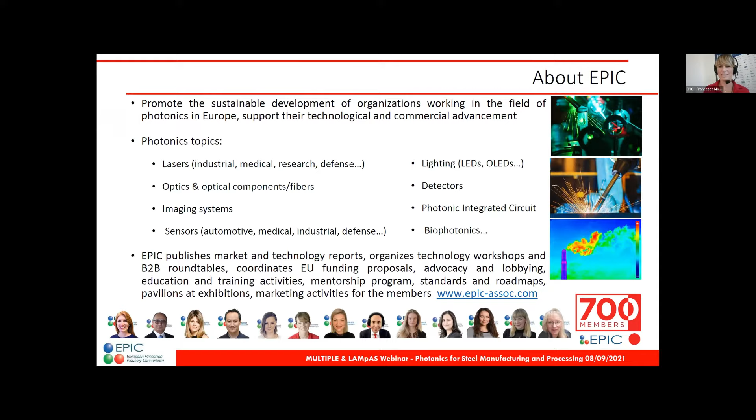Then we have a lot of initiatives. We also coordinate EU funding proposals. We are lobbying for more financing from the European Commission towards photonics, and all these activities are present on our website. So you are very free to join us and see what EPIC is doing for the photonics community. And now it's time to spend a couple of words about the two initiatives that we have here today, MULTIPLE and LAMpAS.

I start with MULTIPLE, which represents the future of photonics-based process optimization. We are halfway through our project, and the idea is to provide cost-effective multimodal monitoring solutions. We have a full solution that will be monitoring and optimizing the manufacturing chains in different industrial fields. And then we have 5 building block products that can be flexibly combined with each other and used for different applications: snapshot, visible and SWIR hyperspectral imaging cameras, laser-based IR analyzers that we will hear about from our partner today, organic electronics-based spectrometers, multimodal monitoring systems, and cloud and edge computing platform and services.

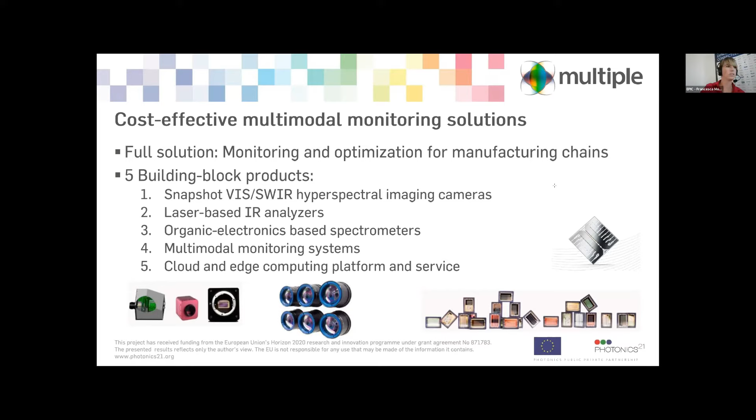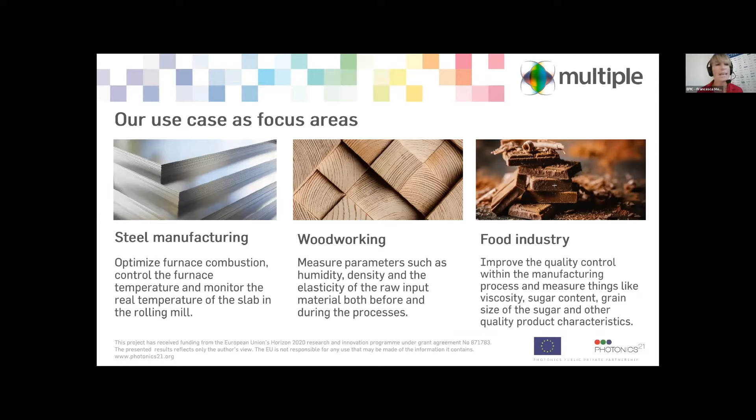First, I have to spend two other words about LAMpAS. LAMpAS is there for basically giving us the possibility of surface enhancement inspired by nature. Because basically we realize that if we are inspired by nature, we can see that if we can control topographic characteristics over surfaces, we can really give special functionalities to surfaces. And this can be antibacterial, self-cleaning properties, friction reduction, optical security function, or even decorative effects.

And this is possible usually with coatings or with extra chemical components that we can add to surfaces, but also with lasers. And this is possible only with special lasers, the ultra short pulse lasers actually, that can really generate these multi-scale topographies on the surfaces that give these characteristics to the surfaces. The problem is, this is possible, yes, in research labs, but is really not yet suitable for mass production, low cost, and especially high throughput.

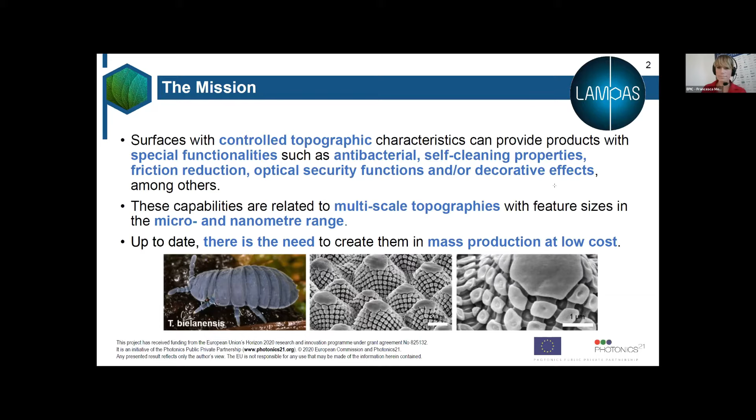Now you are starting to put the puzzle pieces together, I assume, and then we will integrate everything in a device, a big machine, a system design from our partner Lasea, and then we will be able to use it also for different applications. But maybe we will talk about it in another webinar soon. We focus today more on process control.

You are muted. That's the standard. No, you are still muted. Now? Yes, now, sorry. Very well. No problem. Good afternoon, everybody. I will introduce our company, okay? Let me see here. Sorry, I cannot find it now. With the space bar, you can change. Now, yeah. Okay. Perfect. Sorry about that.

LDL key data. We are the latest European rolling mill. It's a greenfield project in Tarnos, France. We started operations in the first quarter of 2018 with the production of heavy plates. We have a capacity of about 500,000 tons. We have 20,000 square meters on 10 hectares. We are based in Tarnos, a small town at the port of Bayonne in France, in the Bay of Biscay.

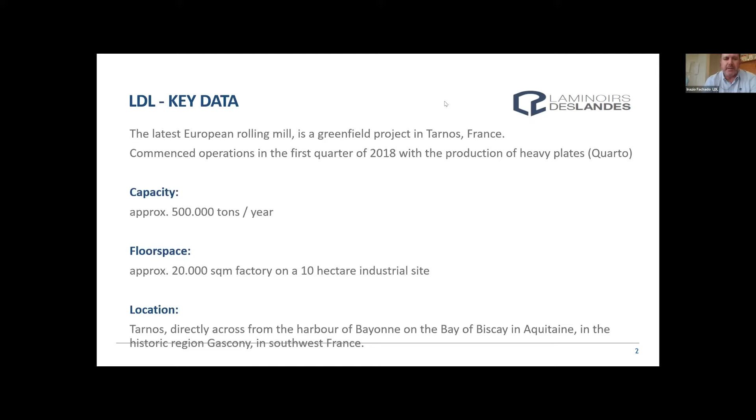What we do: we manufacture heavy plates of reliable tested quality. Our target is to offer the highest quality steel: thermomechanically controlled rolled fine grain steels, high tensile heat treated fine grain steels, and wear resistant steels. We try to make the difference by going to the highest quality. So the market is focused on normalized fine grain steels, obviously certified to the higher European standards, ASTM, ASME, etc.

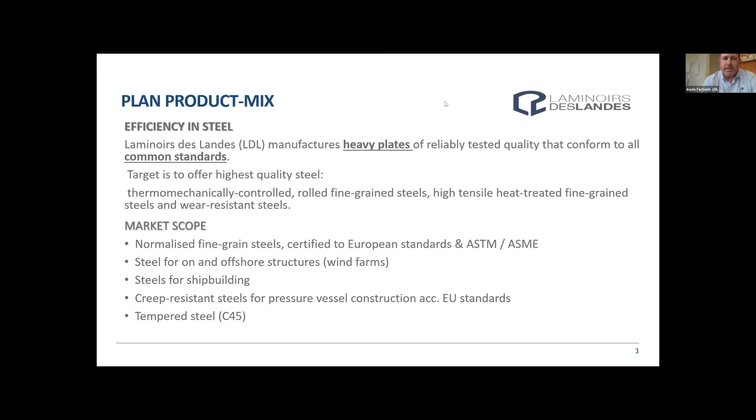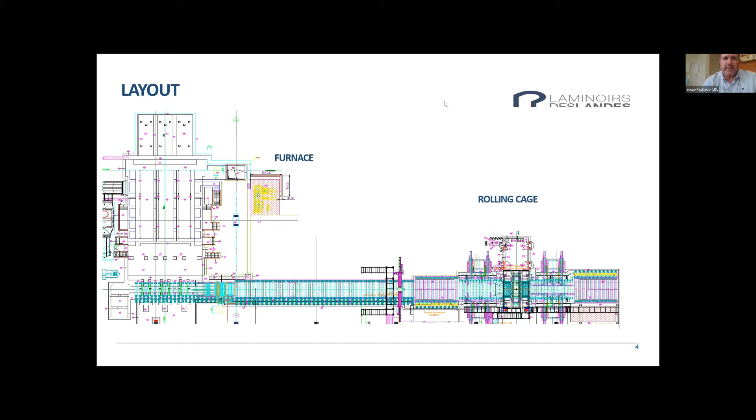Our furnace is a pusher type reheating furnace with a capacity of 80 tons per hour, working in 3 rows of slabs with a maximum length a bit more than 3 meters each. It is complete with a slab charging device, again pusher type, and the discharging system with independent trolleys. We can put slabs of a thickness between 200 and 300 millimeters, width from 1850 to 2500, and about 30 tons maximum weight. The rolling temperature this furnace has to bring the slab to is 1200 degrees.

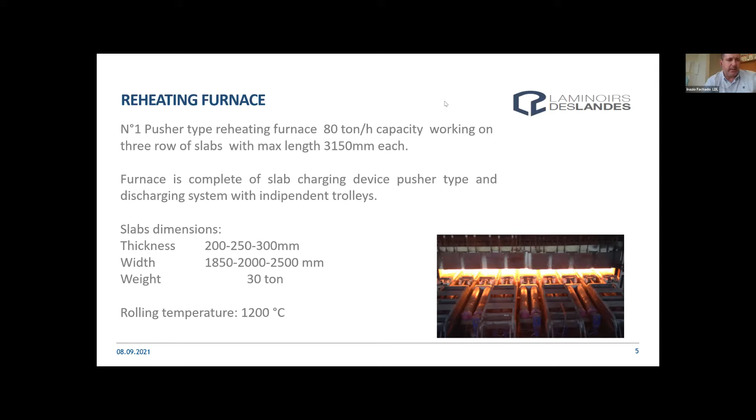We roll in a quarto type rolling mill. So we have 4 rolls, two backup rolls and 2 work rolls. The backup rolls are 1600 millimeters diameter, and the work rolls 950. The big ones weigh about 63 tons, and the work rolls 23 tons. We have 2 electric motors giving 6,000 horsepower and producing a separating force of 4,000 tons.

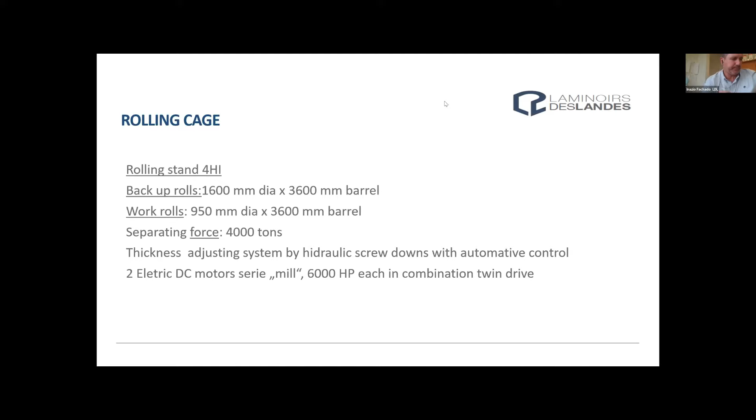We have all control and the thickness adjusting system by hydraulic screw downs with automatic control, which is AHC. So what is the steel plate secret? It is the combination of forces, temperature, and time.

Okay, the objective is to reach quality plus N and plus M. Plus N is what we call normalized rolling. It is the process in which the final deformation is carried out within a specific temperature range. The result is equivalent to normalization through heat treatment in a furnace. In this case, the rolling temperature is always above the transformation temperature.

And we also have the objective to produce plus M, called thermomechanical rolling. That means the final deformation is carried out within a special temperature range in order to achieve a steel with special characteristics that are not possible to obtain with a simple heat treatment. The result is very high quality steel, a fine grain microstructure which simultaneously offers good strength and cold forming properties. This can also be combined with a process with increased cooling speed, as the accelerated cooling process. Okay.

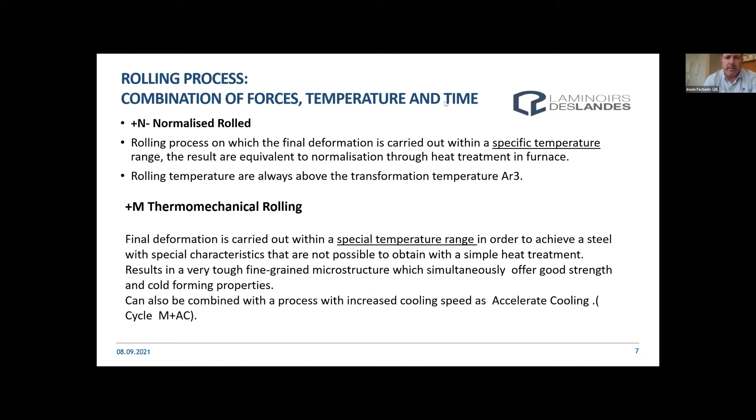So now we are entering the rolling process. What we have done in the furnace, we have implemented AirOptic gas analyzers. These gas analyzers will allow us to control the gas from areas within the oven. We have 5 areas, and we are able to much better control the working of the furnace. We will reduce the delays due to low temperature.

Sometimes when we start rolling at the beginning of the shift, despite the system telling us that we have the temperature, we start the first slab and we see when rolling starts that it didn't reach the proper temperature. So that will allow us to reduce these delays at the beginning of the shift. This gas analyzer will also allow us to secure the regulation of the furnace, secure the combustion, and reduce the CO2 and NOx.

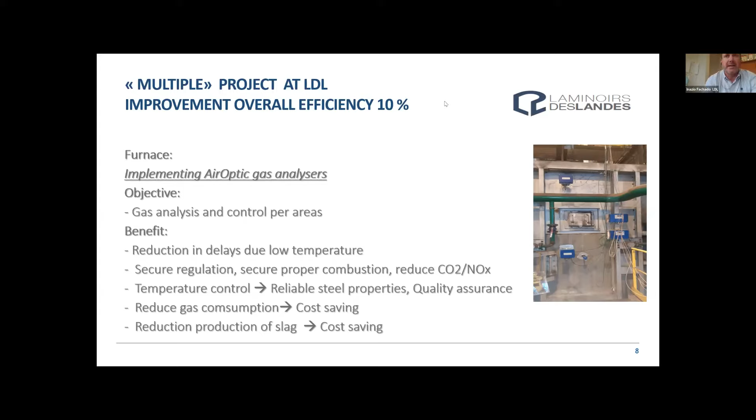And as a consequence of all the earlier inputs, we will also reduce the production of scrap. The scrap is steel that we will not be able to sell as a plate, so it's a loss. So the less scrap we make, the better. Okay.

And finally, in the rolling stand, we have installed 3D cameras at the entry and the exit of the rolling stand that will allow us to better control the thickness and also the steel grade. This way we will avoid some slabs being loaded by mistake, and it is another checking point that will help. So the benefit of these cameras will be more reliability when controlling the temperature.

Nowadays we have some Temposonics, but it's always about how to calibrate the Temposonics. We have to check very often if the Temposonics work properly or not. So with the cameras, we will be able to see if the Temposonics are right or not.

Okay. We have also installed a profilometer after the leveler. Again, it will help us to measure the thickness of the plate. Whenever we have to calculate from the slab to the plate, the programming is always focused on matching the norm tolerances, but also with the objective to use as little slab as possible. But it might happen that the calculations are wrong and we don't reach the thickness tolerance. So the more we control it, the better it will be for us.

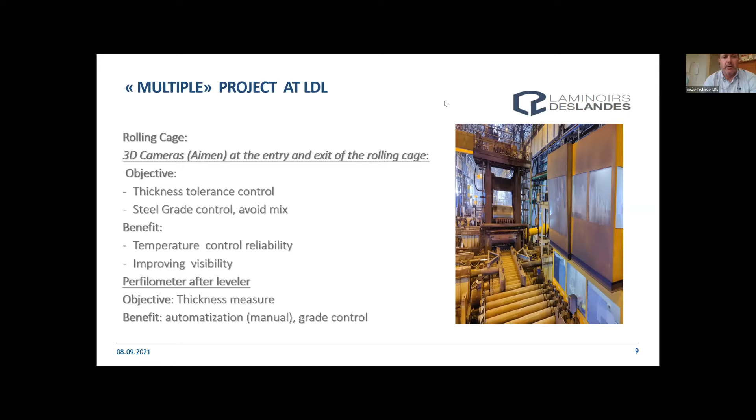And another benefit of this profilometer is that it will allow us to automate the process, because nowadays we are controlling the thickness by hand. We will avoid this hand control, and it also allows us to better control the grade of the plates. So basically it's all about the process, and we are very confident that now we are in the process to activate all the data collecting, and we expect to reach the target. Okay.

So my name is Pawel Kluczynski. I'm the CEO of Airoptic, and today I will talk about application of laser-based analyzers in the steel industry. I will try to present more from the analyzer side rather than application, because you already presented the goal for usage of the gas analyzers. So first of all, some brief information about our company. We are a small medium enterprise based in Poznań, in Poland, and we manufacture laser-based gas analyzers for various industrial applications. The steel industry is something which we started very recently.

But we mainly focus on applications in industries where traditional gas measurement is difficult because of high temperature or difficult conditions, or where fast response time is very necessary, as well as low maintenance. We mainly work with the power industry, petrochemical industry, chemical industry, wood industry, and, as I mentioned, also steel. We have in-house technology and an R&D department on site, so we can also make customized solutions for customers if there is a special request. We mainly work on export: 90% of total revenues accounts for export and 10% for the internal market.

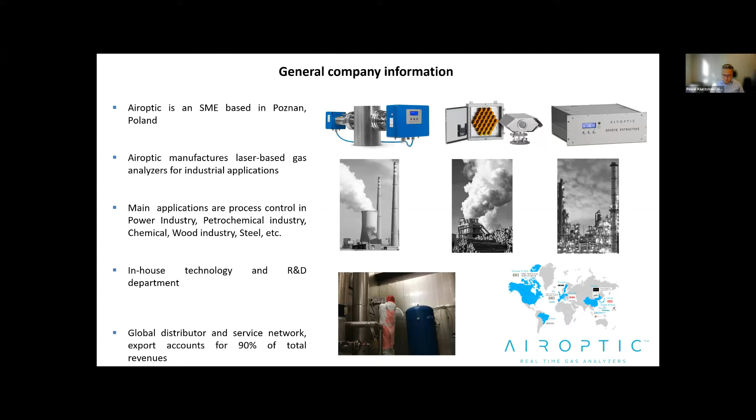We have different kinds of gas analyzers, all based on laser technology. Today I will only talk about so-called in situ analyzers, the ones which are used directly on the process, without any sample conditioning. But just to mention, we also have open path analyzers, so we use laser technology to measure around the fence, so we can measure leakages from different industries at up to 1 kilometer distance.

And finally, the extractive analyzers, more the traditional type, where the sample is extracted from the pipeline with some sample conditioning system, and then the analysis is done internally in the analyzer. It's more like a gas chromatograph, but it's based on laser technology. But it's a bit outside of the scope, so let me continue.

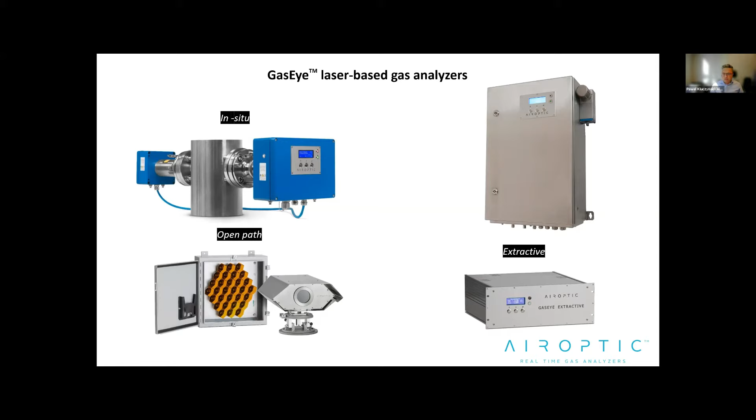So when it comes to the in situ analyzers, as I mentioned, the systems are relatively easily mounted on the process. It can be a chimney, it can be a furnace, it can be any pipeline. And you do it with different kinds of flanges. In Europe, we have DN50 flanges, but we also have ANSI standards for the American market, and also JIS for Asian markets, and that's basically just a matter of configuration.

But the idea is that you measure directly in the process, so you have a very fast response time to whatever happens to the flue gas or the gas you measure, and that's why we can have different applications for control. So basically, process control of different industrial processes. Typically, combustion control. It can be also safety application, like you basically monitor some process and monitor some gas which is critical to the process, like carbon monoxide and oxygen.

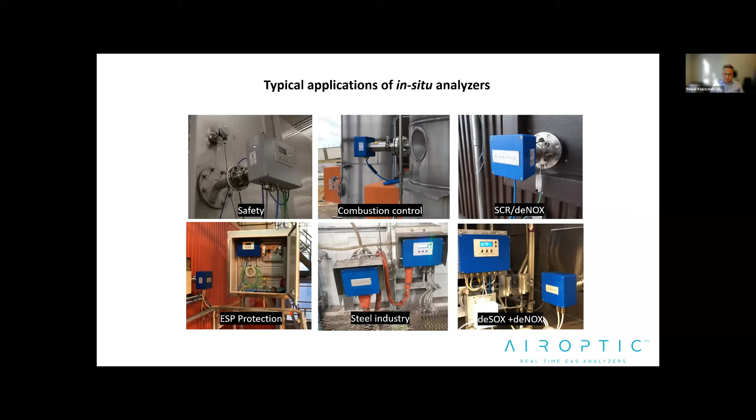So the principle of operation, the physics is very simple. This is based on the absorption technology. The system consists of two units. It's a transmitter unit which sends the light from one side of the process to the other, so shining the light exactly through the process. And then what we do is we measure the absorption of the gas. So the gas acts like a filter, basically, which selectively reduces the light intensity after passing through the process.

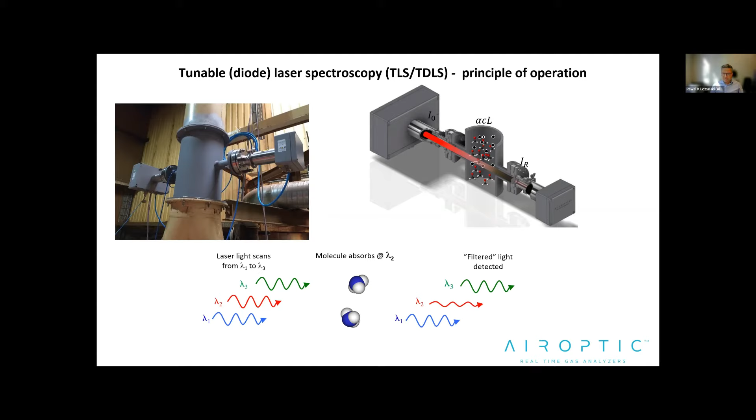So that's in principle very simple physics, but the difficulty in practical conditions is that normally you don't only have the gas of interest, you have also a lot of dust. For example, if you burn coal in the coal-fired power plant, there's a lot of dust which scatters light more than the molecules actually absorb. But the analyzer is capable of distinguishing between one and the other. So it's very selective and very sensitive. So absorbances down to 10 to -7 in relative units. So compared to FTIR, this is already three orders of magnitude.

So one of the typical examples of the application is combustion control. In the beginning, we only used the oxygen system. So we are measuring oxygen basically directly in the boiler above the fireplace to try to optimize the combustion process in real time by using our signal. Then we also added carbon monoxide analyzers, so you can actually try to optimize combustion a little bit closer.

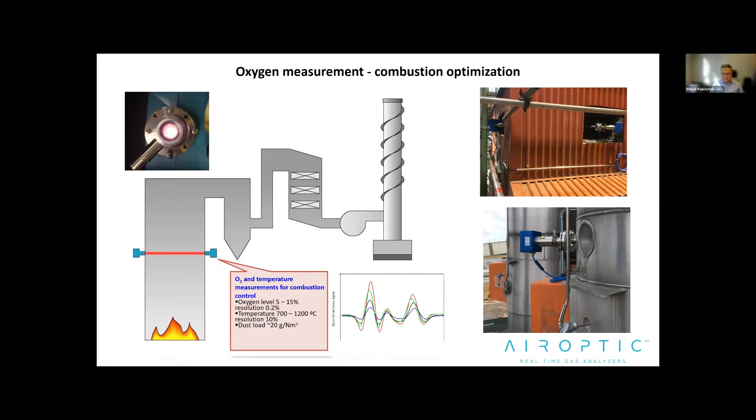And that's what's typically used in the boilers, so not in the steel plants, but at a bit lower temperatures, say in the power plants or in some chemical processes, and anywhere you have a combustion. And it seems to be already well-proven technology and accepted.

So the drawback of the in-situ lasers is that they are very selective, but you need basically one analyzer for one gas. So what we did in 2018, we released a model which combines two lasers into one analyzer. So the form factor is basically the same, but you are measuring carbon monoxide and oxygen and water in one analyzer. And this has already been proven in smaller stacks and for combustion optimization in smaller boilers, and also in some power plants.

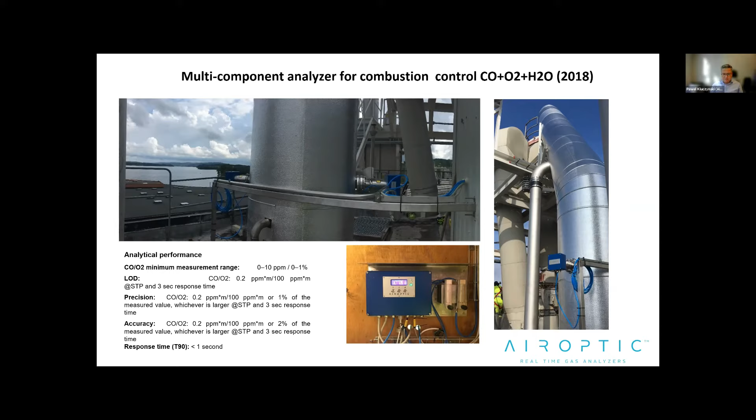And then we asked ourselves the question, can we use it also for different processes like the steel industry? And that's what we did a couple of years back, but for a little bit simpler case, when we had a hot rolling mill and optimized the furnace conditions by measuring either the oxygen or carbon monoxide or both. And the only difference with the boiler was that here the temperatures were up to 1350 degrees, so the conditions were slightly more difficult, but it also proved that this technology can be applied to the steel industry.

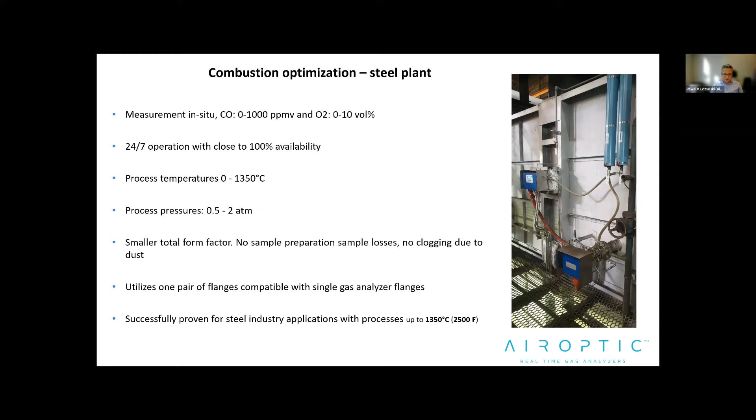There are some technical issues here, that we have to add some additional cooling devices if the ambient temperature is above plus 55 degrees, but nevertheless, it proved to be working fine. So the next step was, except for combustion control, can we use something else? Can we use some other type of optimization?

So we also had the installation for optimizing the fuel, the measurement of the fuel composition of the gas which feeds the furnaces. And that was done, for example, in the case when the gas used for the reheating furnace is mixing different types of gases available in the plant. And these components can be changing in time. So the customer wanted to have the knowledge of the real-time composition of the gases.

And we deployed two analyzers, one measuring methane, ethylene, and water vapor, and the other carbon monoxide, CO2, and H2S. So basically, this was enough for the customer to get some additional knowledge in real time about the gas feeding the furnace.

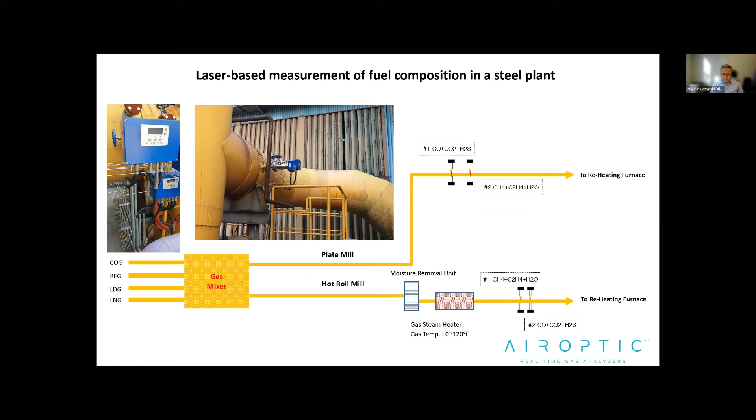And now, finally, what we try to do in multiple projects, together with LDL and Russula and Aimen, is to have a very advanced analysis of what's going on in the reheating furnace. As Ignacio already showed, there is a plan to deploy analyzers in 3 different points, and not only measure the carbon monoxide and oxygen, but also extend it to temperature, water vapor, CO2, and also NOx. It's not shown on the graph, but basically to have a very complex analysis in real time of the

gas composition. By means of this, we hope to save energy, basically by optimizing the combustion process more closely and precisely, but also to reduce waste in the form of waste material. That's what Ignacio also mentioned in his presentation, that if the combustion is not sufficient or the conditions in the furnace are not optimal, then it produces waste.

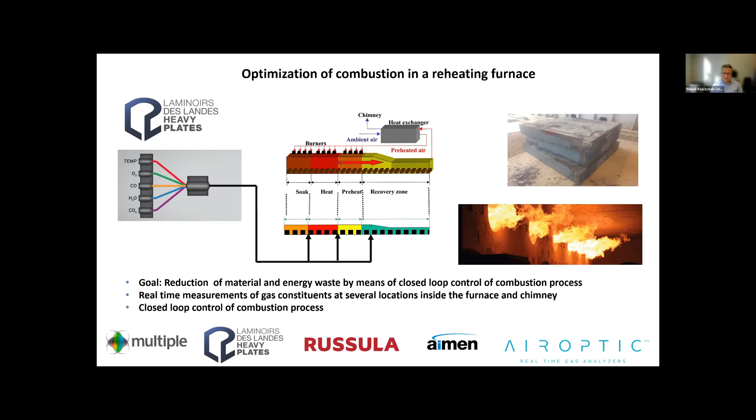The project has basically started recently. Now our systems are installed at the LDL, and I hope the first results can be expected in September already. We are all very curious how it will all work in the closed loop system, because the idea is also to use our outputs of the gas concentration in the edge computing device. That's the whole idea about Multiple.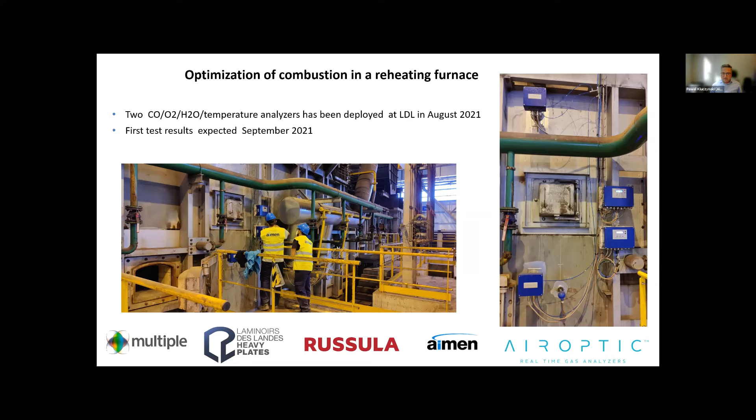And also I hope in combination with the camera information to have a more profound control of the furnace condition. This is really something new which had never been tried before, so we are all very excited. From our part, the analyzer part, just to summarize, in situ technology as such can provide really fast response times, because this was already proven, and it can in general be used in fast closed loop control, because most of our clients use our analyzer in fast loop control. This is really something standard in the power plant today.

And for the temperatures, there is basically no high temperature limit for the spectroscopy. Because we use laser, it's very selective and sensitive, so it's not like the non-dispersive techniques. Last but not least, these analyzers are made for 24/7 operation. They have a self-calibration feature, which gives you low maintenance and low cost of ownership in the end. Mechanically, they're also suitable for this type of environment, and we can deploy them in hazardous areas if necessary, for example zone 1 or even zone 0. So this concludes my talk, and I'll be happy to take any questions.

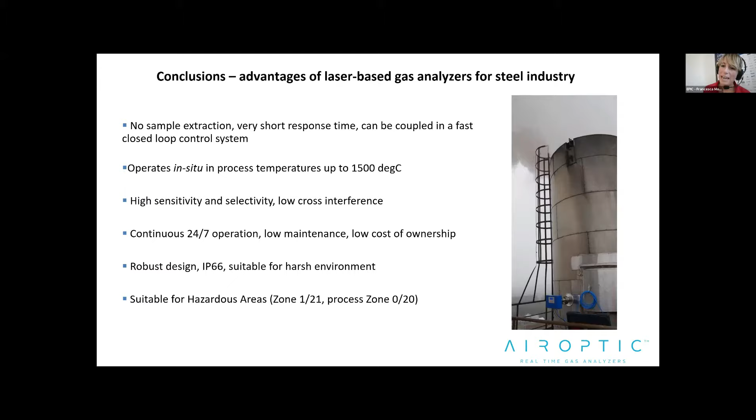Thanks a lot, Pavel, also for highlighting the specialty of Multiple, and especially your role in this. An important thing Multiple is doing, apart from this adaptability to different manufacturing conditions, is the broad spectrum we are covering. We can go from visible to mid-IR, and actually you are the mid-IR person in Multiple. For us in EPIC this is really important because we have now started an adventure with the Mid-IR Alliance, an initiative to push the mid-IR technologies a bit more. Here in the room we also have Rodrigo, who will later talk about this wavelength range. So today is also a bit the long wavelength meeting.

So maybe Pavel, you can tell us a bit about your experiences, because you have been an integrator of mid-IR technology since you started, since that's a range of high interest. Can you give us a hint on what the challenges are for you as an integrator of these technologies that could be faced to improve your technology for steel processing, but also for other applications and gas sensing?

Yes, definitely. Francesca, of course the paramount goal is to be able to combine mid-infrared technology with near-infrared technology, to create a wide broadband coverage, because broadband coverage gives you the possibility to measure several components at the same time. This is something everybody needs in any industry, because we need tighter control. The more parameters you control, the more gases you measure in our case, the more added value. So of course the challenge is being able to combine the wide wavelength ranges with the available photonics devices today.

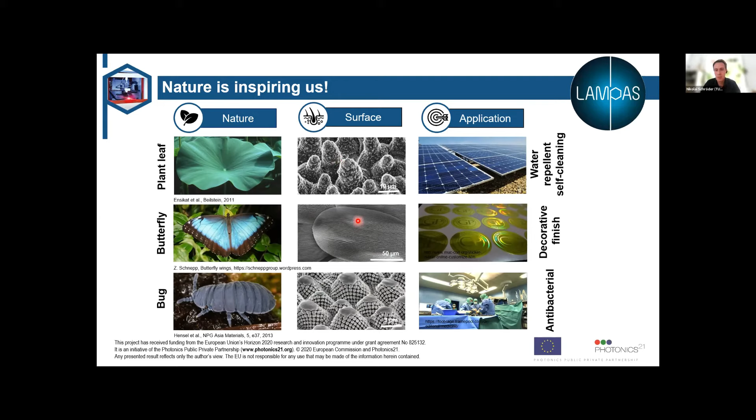And now we can create these surfaces directly with lasers on a lot of different materials. And we are doing this with some technologies. Here I'm going to present two of them. First of all, direct laser writing.

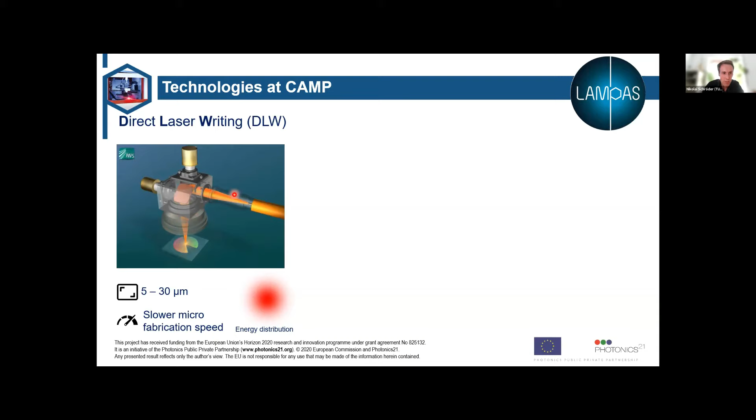Here we have a laser beam which is deflected by a galvanometer scanner and is brought to the surface of the sample. Here we achieve a resolution from 5 up to 30 microns. And let me say it's a slower microfabrication speed compared to the next technology I'm going to present. And the energy distribution of the laser beam is here dot-like.

Our main research area is direct laser interference patterning. In this case, we have one laser beam coming into this DLIP optic. And in this optic, it is split into two sub-beams. And in this case, with a galvano scanner, it is deflected directly onto the surface of the sample, so that we can achieve a so-called interference pattern on the surface.

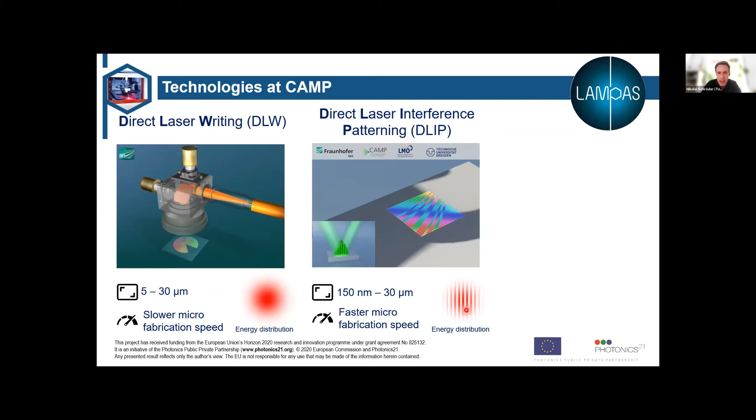Here we receive feature sizes from 150 nanometers up to 30 microns, and it is a much faster fabrication speed compared to direct laser writing. So how many patterns can we generate with these DLIP experiments? In this case, we have a line-like pattern on the surface, but there are thousands of possible patterns.

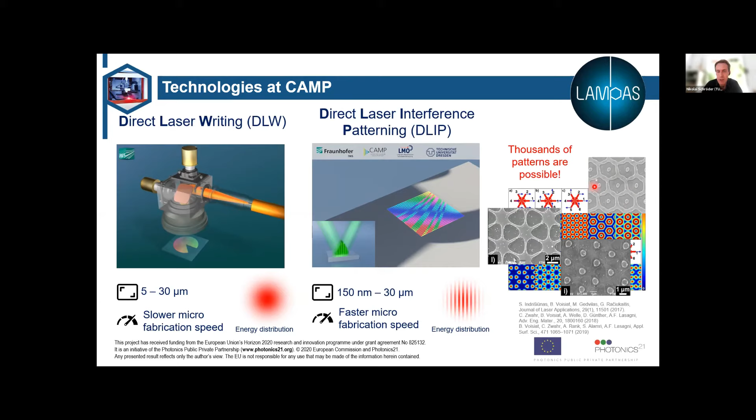It depends on the number of sub-beams and on the type of polarization of these sub-beams. And here are some examples of surface structures, like flower-like or like a honeycomb. It depends on the application you would like to achieve. And how can we produce it? Here we have two scenarios.

Scenario one means we have low pulse energy and a high repetition rate from the laser. Therefore, we need a several kilometers per second, and we receive significant heat accumulation, which is not good for our material because it will be destroyed. Scenario two means the laser has a high pulse energy and a moderate rep rate. Here we can achieve high throughput with large spot sizes, but unfortunately, the feature size resolution is pretty low.

So our solution to make it better is direct laser interference patterning. Here we have high pulse energy with moderate rep rates, and we are using so-called interference patterning. Here we reach scanning speeds of some 100 meters per second. We will do this with a polygon scanner. We receive lower heat accumulation and, of course, higher resolution due to the interference pattern.

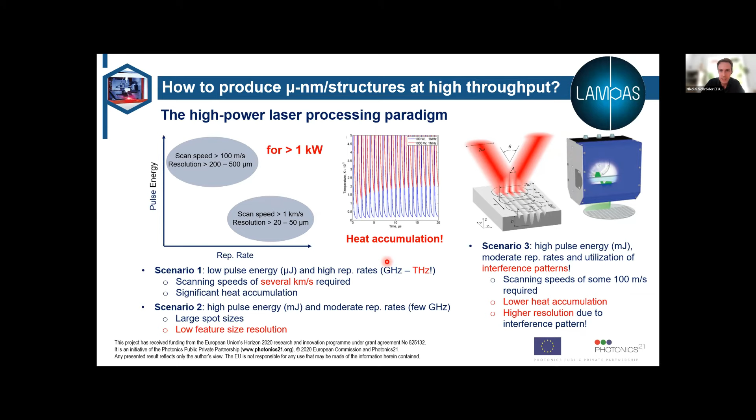And this technology we are integrating into LAMPAS. It is multi-beam high-speed processing. Here are shown the 6 sub-elements that we will develop during this project. First of all, we need interference patterning for high-resolution beam processing. The polygon scanner will bring the laser directly to the surface of the sample.

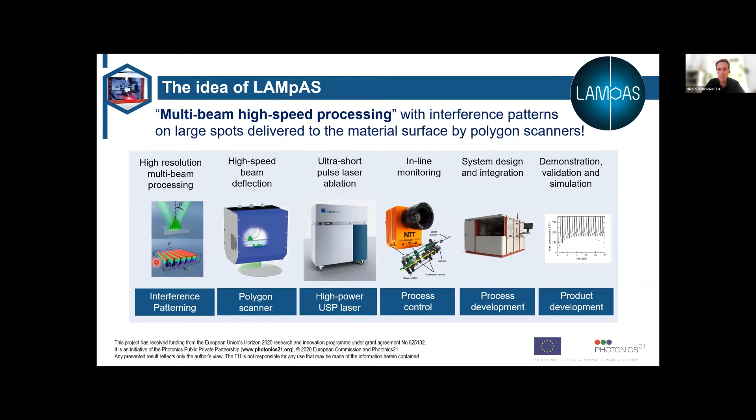And of course, we can't ablate or generate a surface structure without a laser. That's the reason why we are developing an ultra-short pulse laser system. The inline monitoring system ensures the quality during the whole laser structuring process. This I will present in the next slides. And in the end, we have to integrate these 4 submodules into a whole new machine. And of course, we have to validate this machine with some samples in the end.

In this project, we are 8 different project partners from all over Europe. Trumpf is a huge laser developer. They will do the laser development, and the beam deflection system will be done by NextScan and by the Technical University where I belong. The process monitoring system is done by NIT and also by the Technical University.

The system integration, so the combination of all these sub-modules, will be done by LASEA. And of course, the validation and demonstration is done by Bosch and BSH. And for organizing these events, EPIC is doing the dissemination of LAMPAS.

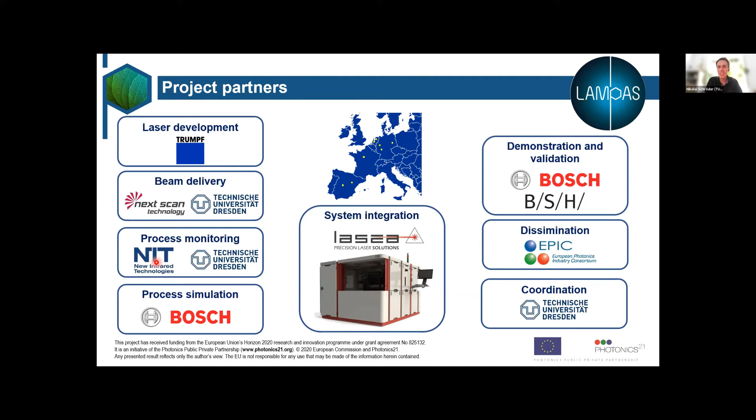Now we come to this unique inline monitoring system for LAMPAS. In this case, we will monitor two process effects. First of all, the accumulated heat that we don't want to have during the process. And of course, we would like to correlate this with the topography assessment of the patterned structure.

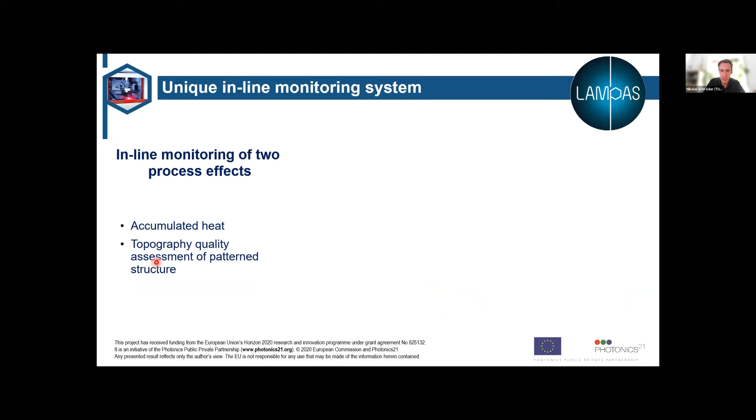And we are realizing this with a combination of a high-speed infrared camera, which is done by NIT, and what's also new is the second one that we are combining it with: the fast Fourier transform system. So that's a unique measurement system for analyzing the topography of a periodic pattern.

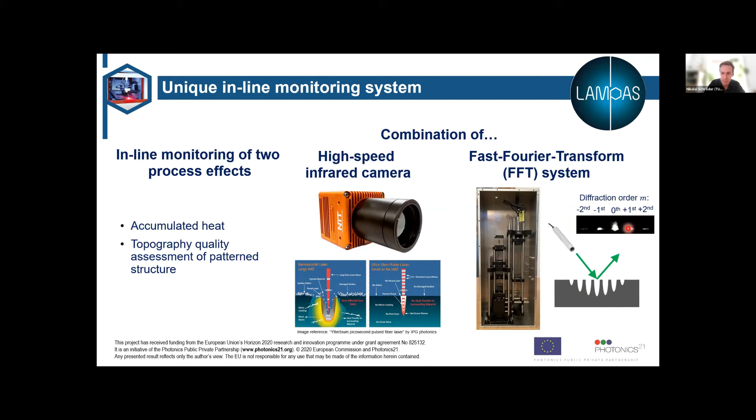So what do we need for it? First of all, we need a laser pointer, a low power laser with a low laser power, a periodic structured area, and of course a screen. We are using it here with a camera. So that means when the laser irradiation hits the area, the laser light is separated like this into some clouds. We call these diffraction orders here. And depending on the quality of these laser structured areas, the intensity or the behavior of this diffraction pattern will change. Let me show how it works in real life.

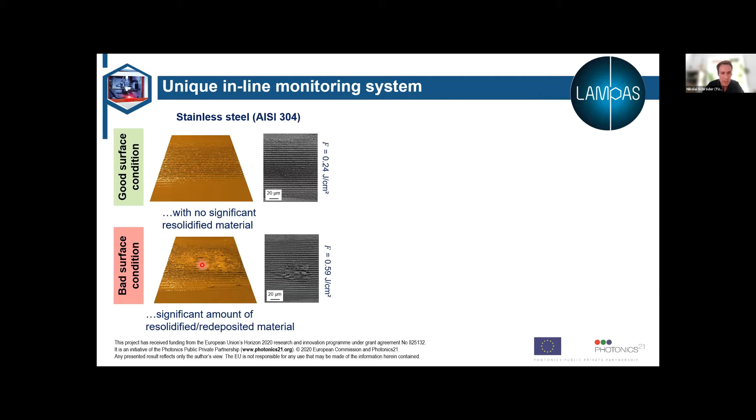Here are some examples of structured stainless steel. Here we have microscopy images of a good surface condition. Here you can clearly see the line-like pattern from the DLIP treatment, and there is no significant resolidified material on top of it. Down, there is a bad surface condition with a huge amount of resolidified material on top of the line-like structure. So in the end, the pattern is destroyed.

We monitored this process with the infrared camera, and we can clearly see that there is a change in the temperature depending on the surface quality. And of course, when we are doing this surface analysis with the FFT system, we can also see that there is a change in the behavior of the diffraction orders. Here, when we have a good quality, like here on the top left side, we can see the plus minus second cloud, and this cloud we don't have in the bad surface quality. So in the end, we have a powerful tool to differentiate good surface quality and bad surface quality.

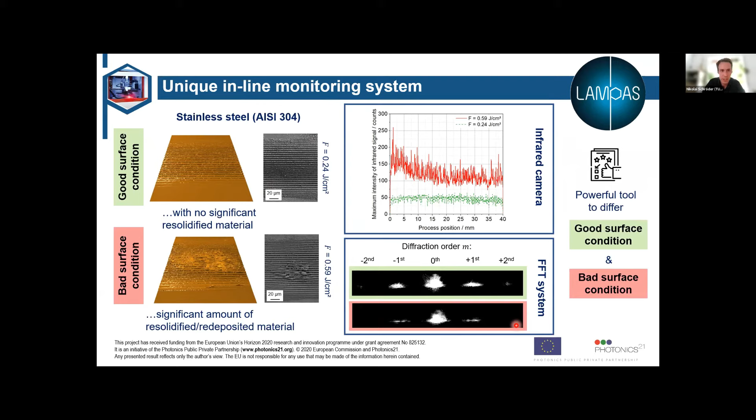What are the objectives and benefits of LAMPAS? First of all, we are going to develop a high power ultra short pulse laser system with up to 1.5 kilowatt of laser power. With this, we are achieving high throughputs up to 5 square meters per minute. The resolution depends on the unique application. With the monitoring system, we also achieve minimal workpiece heating, and of course, advanced surface functions on large areas.

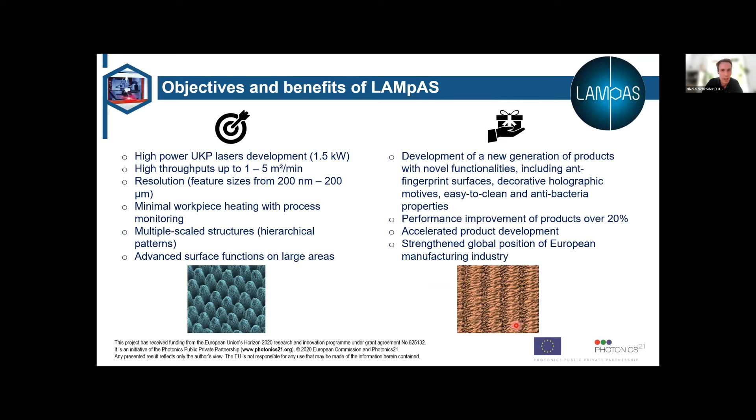So the objectives of LAMPAS are, of course, development of a new generation of products, with different special applications. The performance improvement of these products is also pretty important. And what's also quite good for the industry is that we have an accelerated product development. And what's pretty important for the European Union is that we are going to strengthen the global position of Europe in the world.

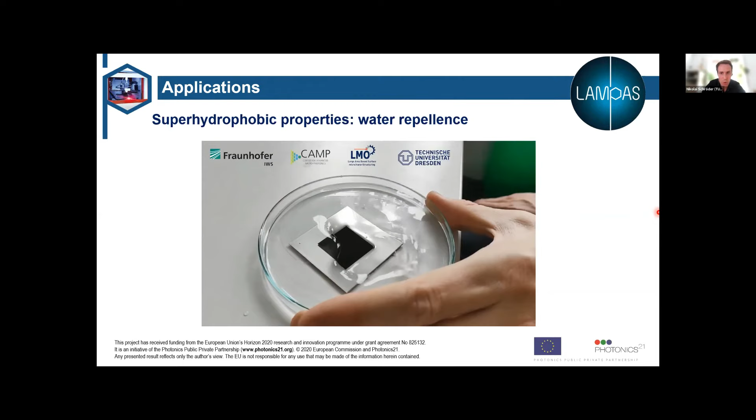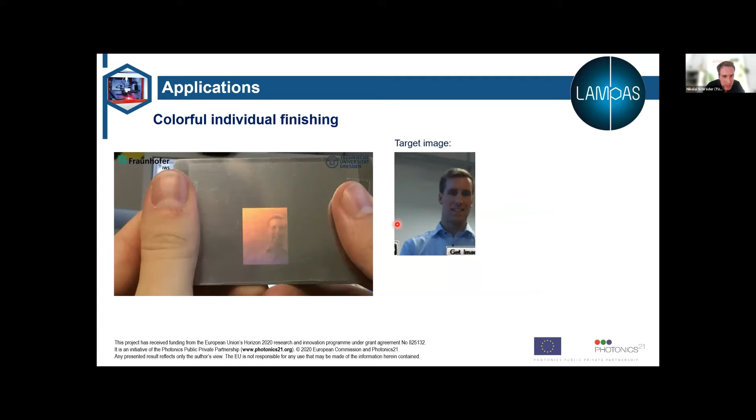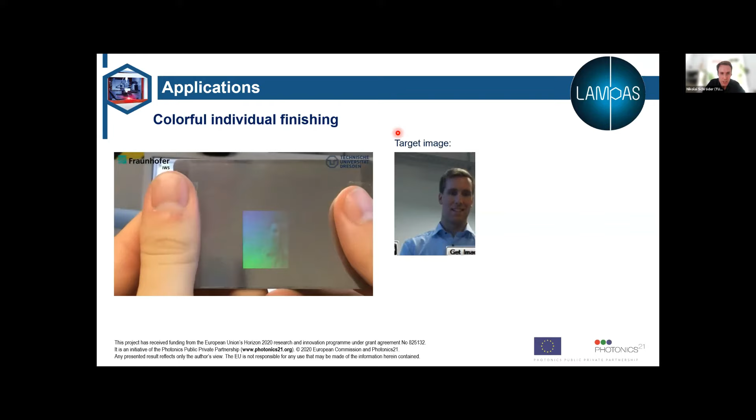The second application is colorful finishes. Here is a picture of my former colleague Stefan. Stefan is a pretty nice guy, and we put this picture on a polymer foil, which you can see in this video. When you flip it, you can see that the colors change, and this depends on the angle of view. And here you can also see how incredibly fast this laser structuring process is with a galvano scanner.

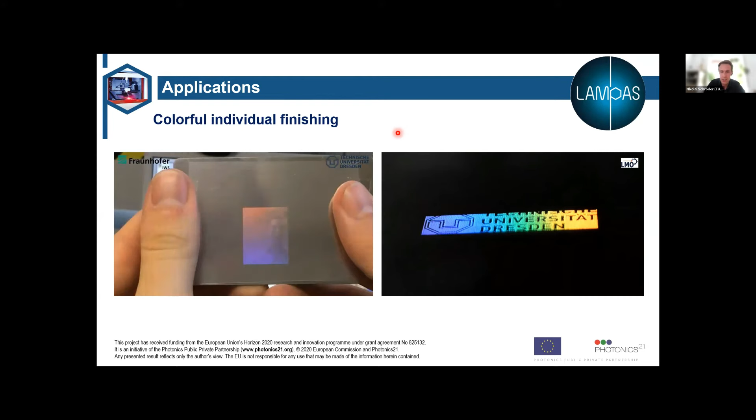Thanks a lot, Nikolai, for the introduction of LAMPAS, more focused on the monitoring system. Now there are a lot of possible topics we can touch, because in this room, and maybe in the future among those who will watch this video, there are end users of the technology, especially from the steel industry, but also people willing to implement their cameras in new devices and new technologies. So let me pick the monitoring processing one.

What is your opinion there? So we work in SWIR. That's because the mid-IR, we know that Rodrigo is covering it. So why not talk about SWIR detection? What are your thoughts, Nikolai, there?

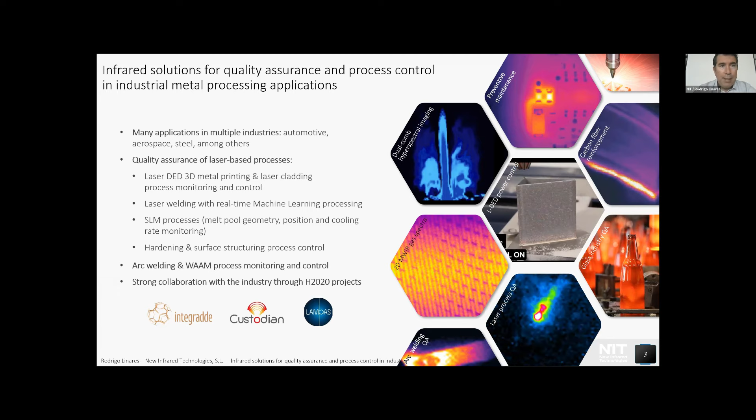These are some of the products and solutions that we offer into the market. Of course, they are targeted to integrators, solution developers, and end users. You can clearly see on the upper left part some basic detectors like line detectors or single element detectors. In the case of the linear arrays, we have a few customers in the steel industry that are using our sensors for detection of defects or contaminants in the steel rods right after production. That's one of the samples of our products.

But I think our very different products are based in the imaging sensors. Right now our state-of-the-art is a 128 by 128 pixel detector that we have integrated into a camera called Tachyon 16K that allows to acquire up to 4,000 frames per second in uncooled operation. As I said, this is very important to introduce the camera into the production line to monitor the process, as we have seen in the presentation from Nikolai before.

We also have some solutions that are integrated directly in the machine, and they can do process control, like for example Clamir. I will show some examples now, or monitoring of the melt pool width, for example, that can be linked directly to the quality of the process.

And now, as I mentioned before, we are introducing a new line of thermal cameras called the LIR 320. This is a very compact thermal camera with performance characteristics totally different than the other cameras, but very useful because it's a very compact system that can be put easily into the production machine to monitor temperatures for predictive maintenance and those kind of applications.

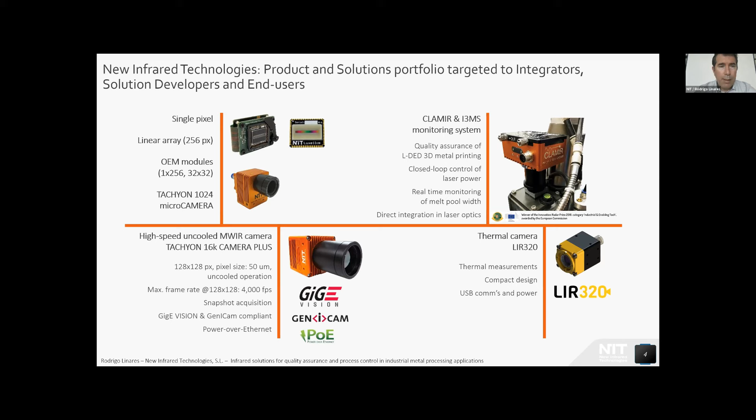Just one example of these solutions that I mentioned before is Clamir. Clamir is an embedded system. We have integrated the infrared camera with a board to do image processing that extracts some features of the melt pool. In this case, this system is made for laser directed energy deposition processes, laser metal deposition as it's known, in which a powder is ejected through the laser, and then a material is deposited to build a part.

So as I said, we have Clamir that combines the infrared camera, the image processing, and the control electronics, and this is connected directly to a laser, and it's capable to close the loop and control the laser power during the complete process. In this case, we enhance the quality and the repeatability of the process. It's a system that is very easy to integrate mechanically and very quick to configure. It's important, and it allows retrofit, meaning that it can be installed in machines that have already been built for this application.

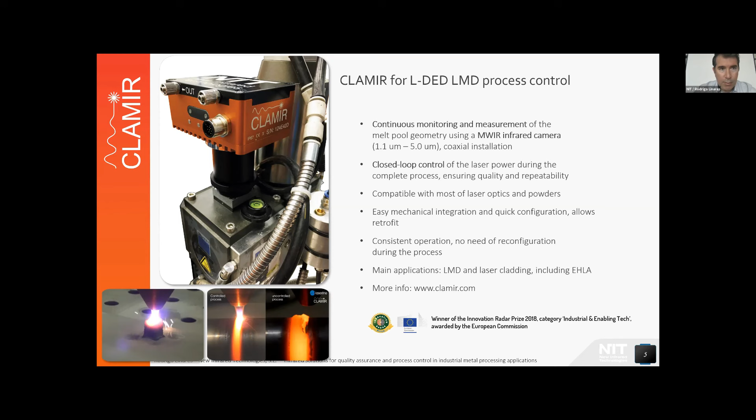As I said, the main applications of this camera are LMD and laser cladding, including the high-speed laser cladding, EHLA. On the left you can see the system installed on the TRUMPF laser optics. I will now give some more examples. So in the case of metal processing with this specific process, the laser metal deposition, you can see some examples of what Clamir is capable to do.

In this process, here you can see what can happen when you build one part without process control, without taking care of the laser power. It can happen that the part overheats and the process needs to be stopped because in the end the part produced doesn't comply with the quality asked of the system. This happens because of an excess of power, and what Clamir does is precisely to control that laser power and enhance the productivity, because then the part can be produced without interruption.

This reduces the rate of defective parts, material use, and energy in a controlled process. And in this case, the process is optimized, and also the productivity. Here you can see an example of a massive metal part built with Clamir process control without interruption for the whole process. And here you can see what Clamir is doing. Actually, it's monitoring the melt pool in real time, and with this monitoring it measures the melt pool width and uses this reference value in order to control the laser power.

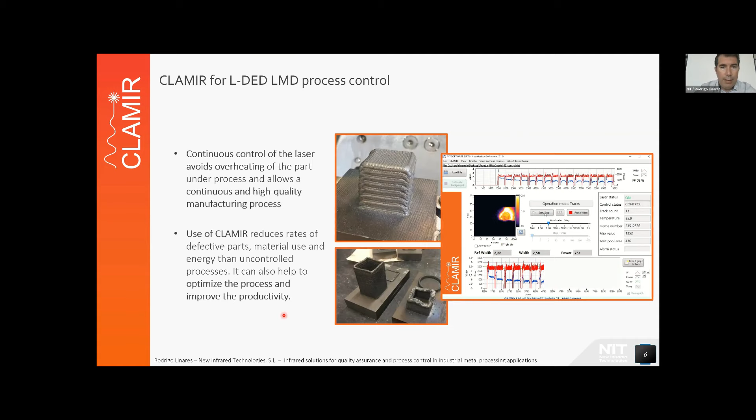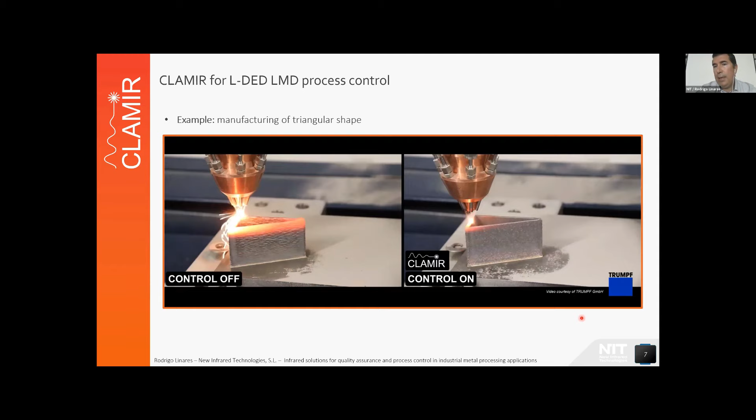Okay, I can show now. Here you can see in the video. Hopefully, you can see how Clamir is acting on the laser power in order to produce the part continuously without defects. Here you can see on the edges that the part doesn't have good quality, but with Clamir, very high quality is achieved.

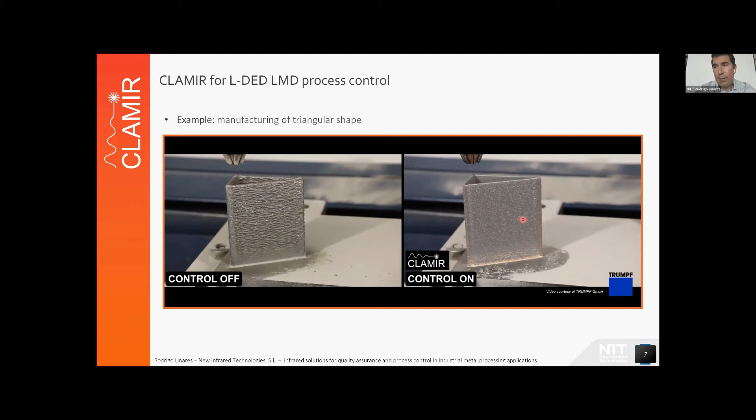Another laser-directed energy deposition process is called laser cladding. This is a continuous process that is used to apply a metal layer on substrates in order to solve possible wear or prevent corrosion, to apply another metal layer in order to change the properties of the base material. This is done also by depositing the powder with the laser.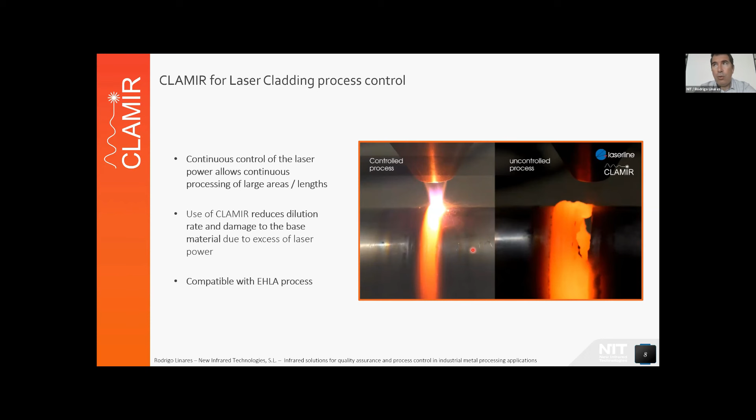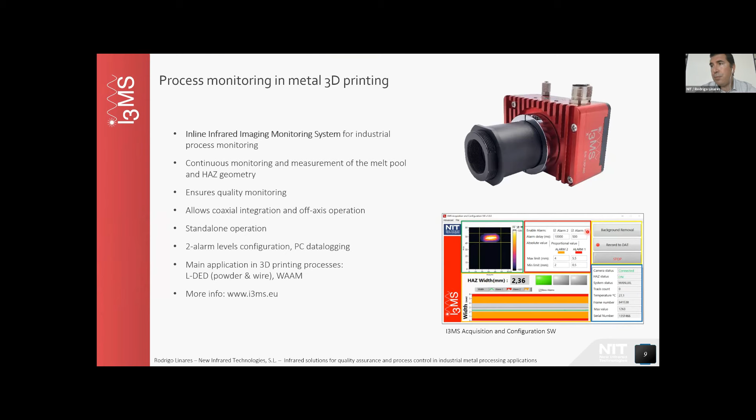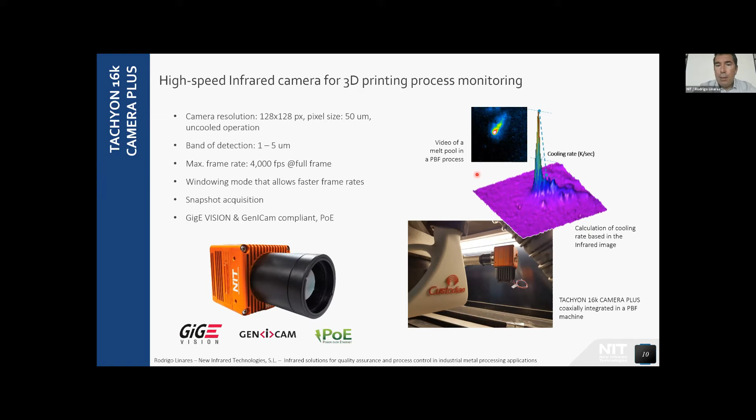This was my presentation. I just wanted to give the attendees an overview of our solutions that can be used for process monitoring and for process control in the case of steel or metal processing applications.

Thanks a lot, Rodrigo. That was really covering a lot of applications. Of course, additive manufacturing is something that we know NIT is really strongly interested in and devoted to. Also laser beam welding, of course, that's your specialty.

Now, I would go back first to see if Thierry is happy, because if Thierry is not happy, we cannot go on. He was asking you to define exactly what is measured by the camera and how it is implemented in process control. Correct, Thierry? Do you want to add something now that you saw the talk? Yes, it's perfectly clear. I didn't notice that Rodrigo was to speak after, but he answered the question basically, and I learned a lot of things. Thanks a lot, Thierry. So then it was worth the wait.

Then I have to say, there is one point that we hear often. So a question a bit more to Rodrigo. I guess this is maybe not the issue now for LAMPAS, but in general what we hear more often is that some applications, more towards additive manufacturing, would like to have more frames per second. Is it something that is actually hassling you? Are you thinking about it? What is the approach of NIT on this?